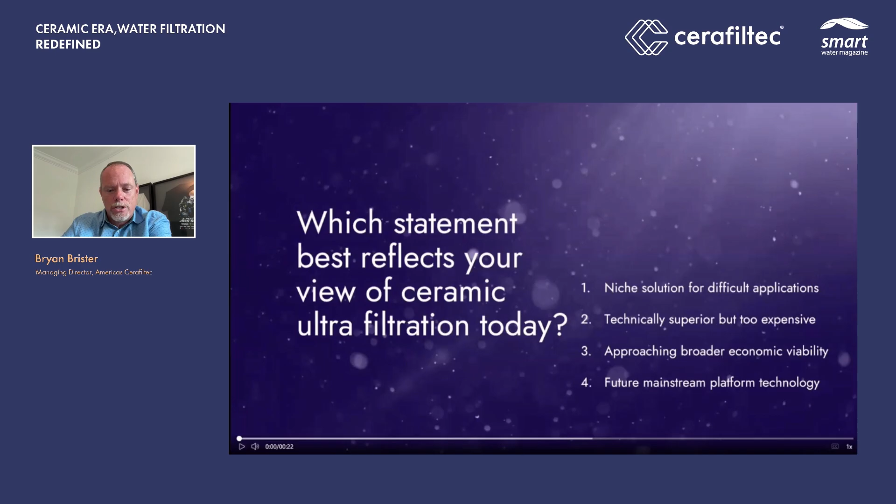A niche solution for difficult applications, technically superior but still too expensive, approaching broader economic viability, or finally, a future mainstream platform technology. And so I ask the audience, if you would, over the next few minutes, reflect on that and select one of those options here to help us out with this poll. We'll greatly appreciate your input.

We all know water systems are under increasing pressures. There are a variety of structural pressures creating impacts on water systems. Aging infrastructure the world over. The planet's going to need longer lived assets. Probably one of the most not talked about challenges, and I'm going to share some data with you in a minute about this, are workforce shortages that are coming, and they're coming fast. We're going to have fewer experienced operators.

We were having a discussion a week or so ago with one of my colleagues, and we were talking about growth in reuse. It's interesting to think that wastewater and the ability to reuse water is actually the only growing source of new potential water. And so reuse is going to require more demanding treatment options. Obviously, source water quality is declining. We're all aware of PFAS challenges. We're all aware of microplastics challenges and a number of other challenging operating conditions.

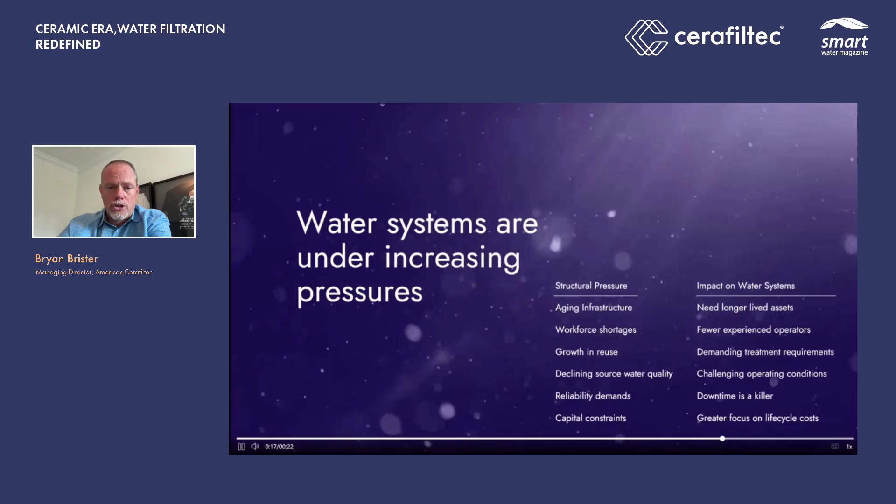Reliability demands, this ties directly to workforce. Downtime is a killer. And then ultimately capital constraints. We've got to continue figuring out how to do more with lower capital budgets. And that's true for industrial and municipal users. So there's a greater focus on lifecycle costs going forward.

I wanted to unpack some of these key structural pressures a little bit more and share that over the course of the next 10 years, it's expected that there will be over a 40% gap in the supply and availability of water suitably purified for whatever its intended use versus what is actually available.

I also wanted to share that the workforce is retiring. For operators in water treatment plants in the US, for sure, US EPA expects somewhere between 33% and 50% of all current water treatment equipment operators to retire in the next 5 to 10 years. As that workforce retires, we're not backfilling. We don't have younger people coming into the workforce to fill those jobs. And that's going to create a tectonic shift in how the industry values water.

And we need to be thinking about technologies that are much more resilient, that have a much higher on time, and that don't require as great of a super trained workforce in order to keep those assets operational when fully a third to half of the workforce is expected to retire in the next decade.

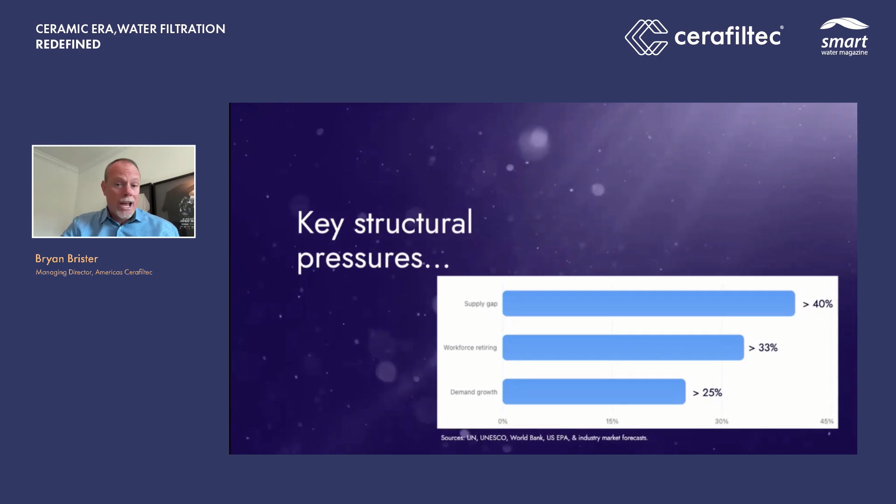And then finally, just pure demand growth, over 25% on the low end. All of this data, by the way, comes from the UN, UNESCO, World Bank, US EPA, and a variety of industry market forecasts. And so this is not Cerafiltec data. This is data and challenges that our industry is facing writ large.

So why are advanced membrane solutions becoming essential? Well, if water demand is going to be up 25%, we've got to have the ability to extract more value from every gallon of water that's treated. If we're facing over the next decade a water supply gap exceeding 40%, then reuse becomes a strategic water source. If we've got a third to half of our workforce retiring, simpler, more resilient systems become critically valuable.

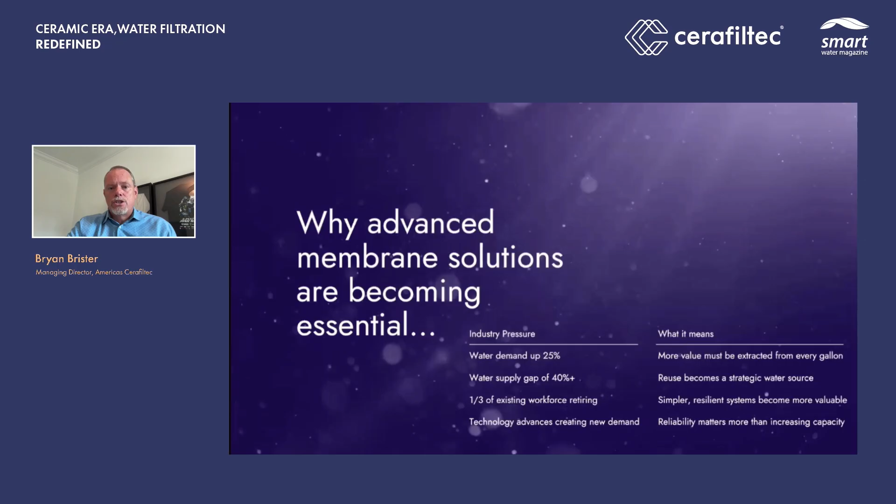And ultimately, technology advances are creating new demands. Reliability matters much more than increasing capacity. So, technologies and solutions that were optimized for problems of the last 50 years are maybe not the right solutions for the next 50 years. And if the world is changing and the dynamics are changing, then shouldn't we also be changing the types of technologies that we're looking at deploying to address these problems?

So, an interesting thought. What if the industry is actually using outdated assumptions about ceramics technology? I'll be very curious to see the results of the poll. Hopefully, you've all had a chance to vote. But historically, I believe there's a view that ceramics perform well, but their adoption has been somewhat limited due to economics. There's a view that they're just expensive. And so, what if today's ceramic ultrafiltration economics justify mainstream infrastructure adoption?

Before I get into some specific economic and ROI calculations, I wanted to give you just a super brief overview on membrane filtration. What are ceramics, their structure, the materials of construction, and operating principles? Well, everyone's familiar with multimedia filtration, sand filters, on one end of a spectrum. On the other end of the spectrum, you've got polymeric nanofiltration and reverse osmosis. Ceramic filtration typically is a very highly porous, sintered either alumina, dialuminum trioxide, or silicon carbide. And so those are the materials of construction.

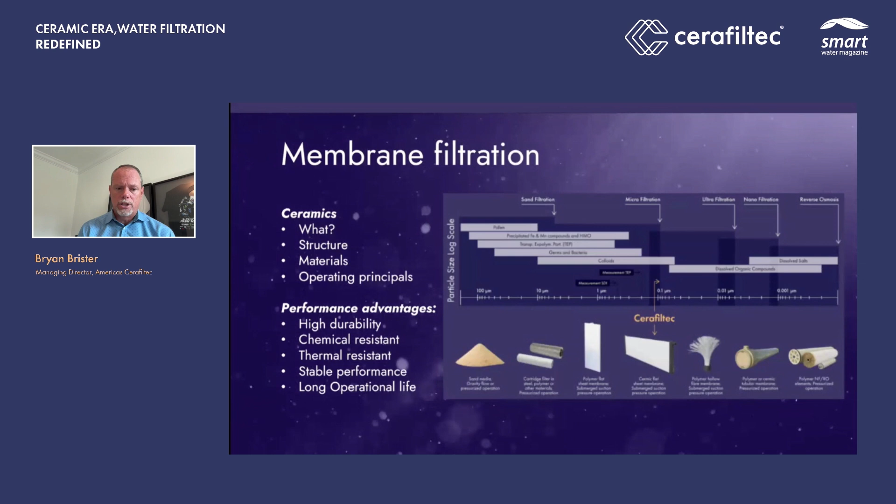They have very stable performance. And my colleague Amrit is going to share several real world examples with you and actual data that underpin this notion of performance stability over the long term. And finally, because of all of those capabilities, they tend to have a very long operational life.

So what we do here at Cerafiltec is we focus on submerged outside-in flow, and our solutions are scalable to your needs. We start with a ceramic plate. It's a sintered ceramic. Our preferred material is alumina or dialuminum trioxide. We take these ceramic plates, generally put 34 of them into a single filtration module. Although we have some flexibility, we don't have to use 34 plates.

If in a particular application we needed to take some of the plates out to create more space in between the plates for greater flow, we can do that. And then we stack those filtration modules into what we call a tower. Now, as a practical matter, we could put as many as 16 modules into a single tower. You notice in that image, we put some feet on it to give it a little bit of a lift off the bottom of the tank to allow flow underneath.

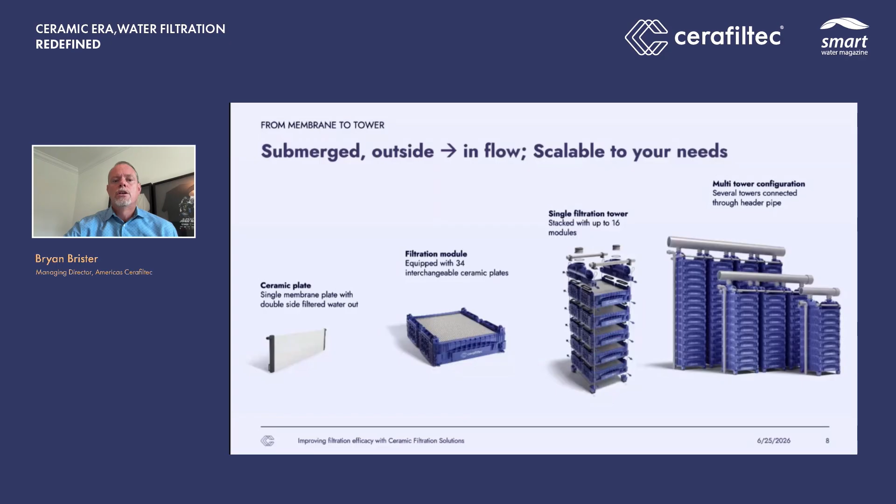And then we attach some headers, generally a sprinkler system at the top. This allows us both to collect the outside-in flow permeate as well as enabling very easy CIP during normal operation. And we can put multiple of these tower configurations into a tank or multiple tanks, depending on a particular need. And so it's a very scalable, low pressure operation, submerged outside-in filtration technology.

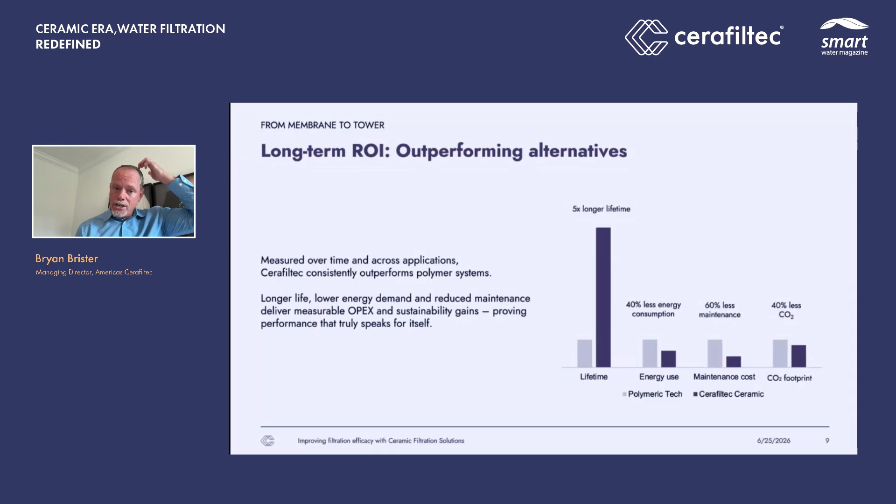So I mentioned a minute ago, what if the industry is overestimating the cost? What if ceramic ultrafiltration has actually achieved a cost structure that makes it incredibly competitive with incumbent traditional filtration technologies? And so I wanted to share some return on investment data, long-term data, that really illustrates how ceramics are outperforming alternatives. Measured over time and across a variety of applications, ceramics are consistently outperforming polymeric systems, and even, depending on the application, multimedia filtration systems.

We generally see a 5x or better lifetime of these systems, and over the course of that lifetime, much fewer needed membrane replacements. And so if you unpack those beneficial economics, we generally see up to 40% less energy requirements in order to operate ceramics. We see up to 60% less maintenance. And certainly from an ESG metrics perspective, if you calculate the environmental CO2 footprint, ceramics are delivering 40% less impact. Obviously, this is becoming an increasingly important and visible topic for civilization.

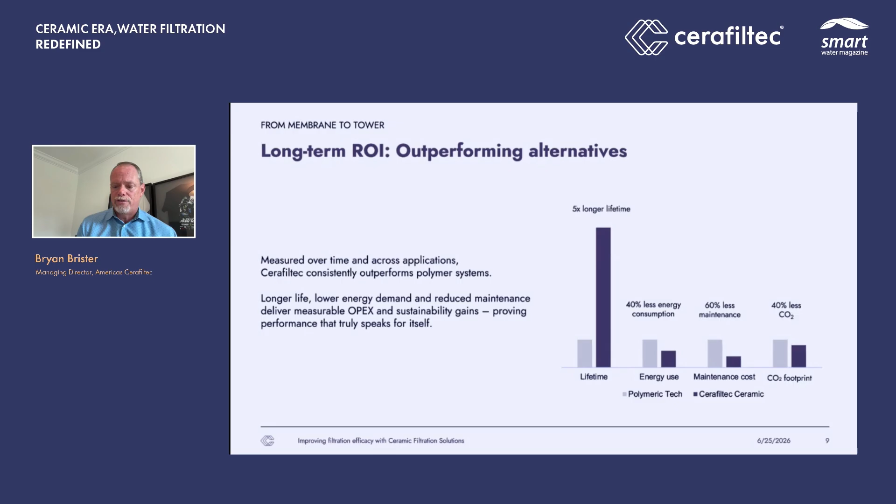So the longer life, the lower energy demand, reduced maintenance, deliver measurable OpEx and sustainability gains, and that improvement truly speaks for itself. And so what I want to suggest is the industry may be overestimating the economics gap. Ceramics no longer carry a multi-times cost premium compared to traditional filtration technologies. Independent studies are showing that even CapEx comparisons on the front end only differ by maybe a few tens of percent. And so therefore, the life cycle economics are beginning to matter much, much more.

You have a much less frequent need for replacing the modules. You have superior cleaning tolerance, much greater uptime, and that uptime is critically important, particularly when we think about what's happening with our workforce. Ultimately, the ceramics are delivering a considerably better lifetime. And so it's an interesting thought.

I can't wait to see the results from our poll. I hope you've had a chance to vote.

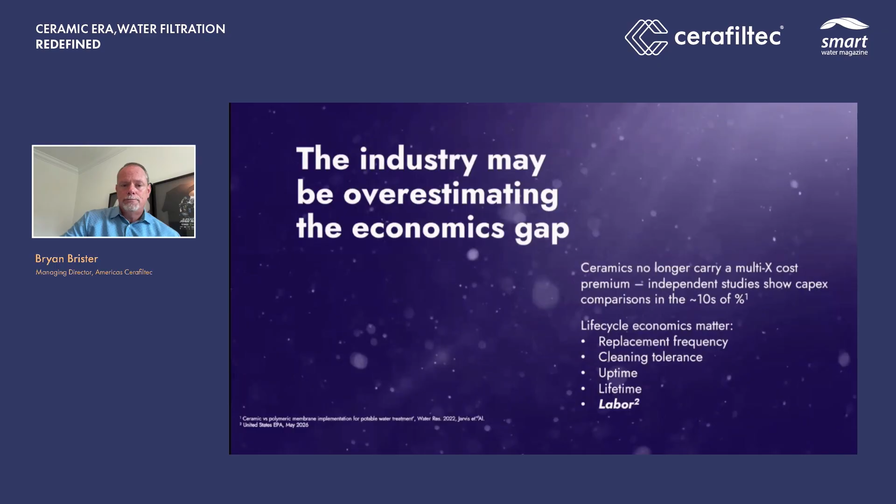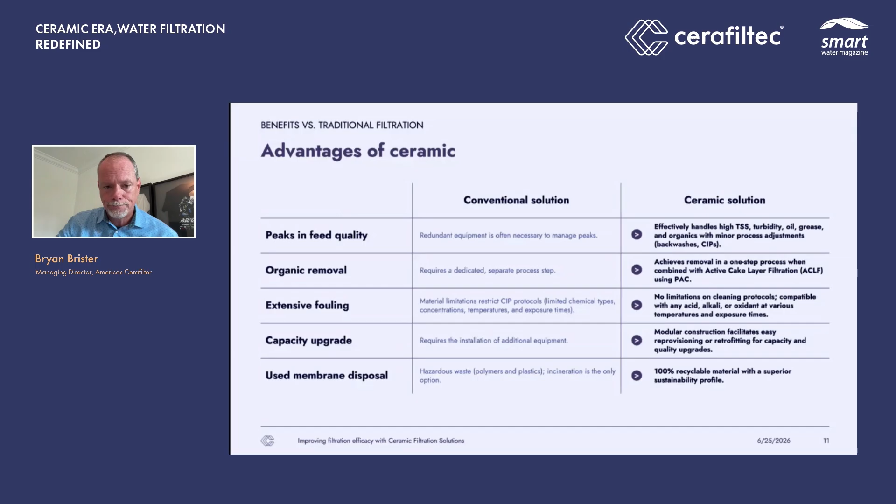So I wanted to make a couple predictions as my last page before I hand it over to Amrith, because I'm certain you're going to want to hear from him on several real-world deployments and the resulting data from them. My predictions on ceramic technology going forward: what matters the most? The old way of thinking was CapEx. And the new reality is that life cycle costs are going to become much, much more important.

We've talked about, and I've shared some data with you. You can go out and look at independent sources that I shared as well on the workforce. The old thinking was that it was manageable, but when fully 1/3 to 1/2 of your workforce is expected to retire in the next 5 to 10 years, this becomes a very, very critical constraint in the new reality. Water reuse is a significant source of water for the future. The old thinking was that reuse was a niche area. And the reality, as we face the future, is that reusing water is going to become a growth engine for us.

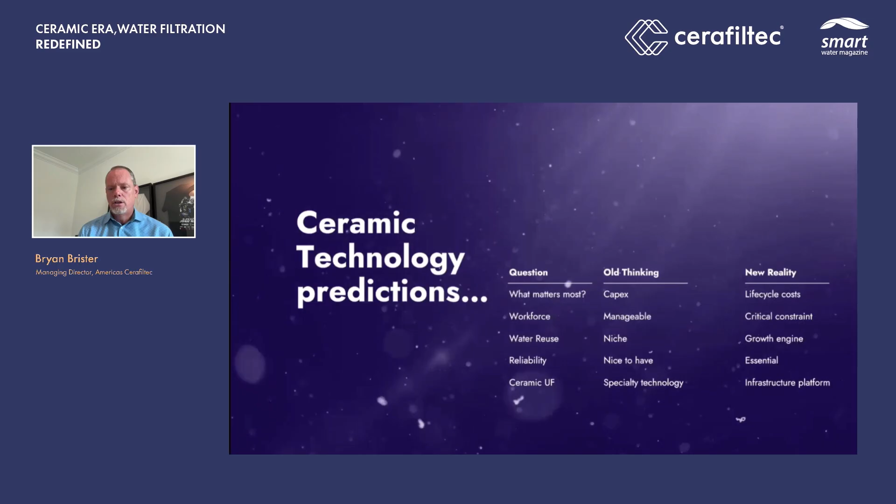Reliability is tremendously important. In the old way of thinking, it was nice to have, but it is absolutely essential going into the future. And so finally, ceramic ultrafiltration. Historically, interesting technology, but perhaps specialty. We believe going into the new reality, it will become an infrastructure platform.